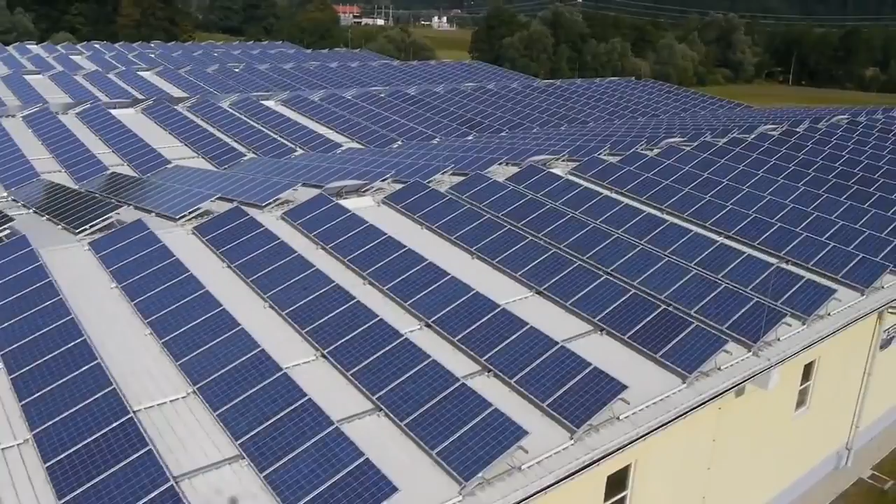However, a great debate is being waged by supporters of each technology. Elon Musk has called hydrogen fuel cell technology incredibly dumb, claiming they're more of a marketing ploy for automakers than a long-term solution. In contrast, Japan has announced its intention to become the world's first hydrogen society, with the Japanese government and the auto industry working together to introduce 160 hydrogen stations and 40,000 fuel cell vehicles by March 2021. So, which is actually better?

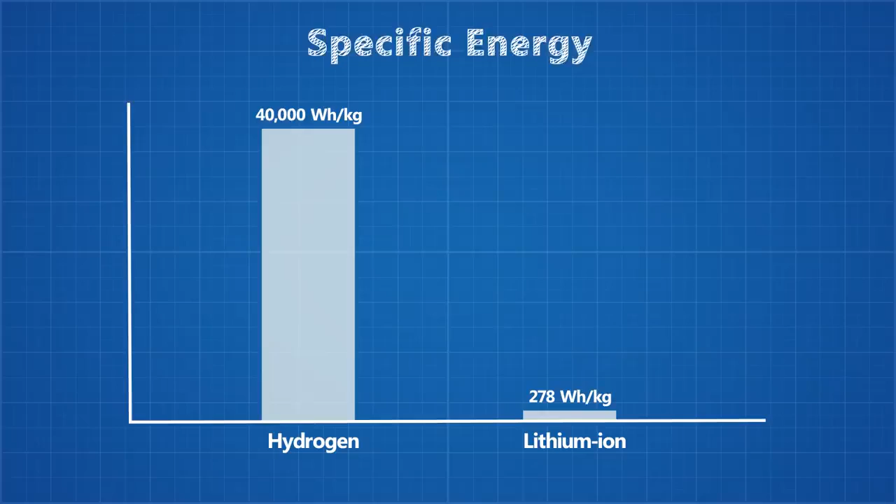At first glance, hydrogen seems like an extremely clever way to power a car. Compressed hydrogen has a specific energy of nearly 40,000 watt-hours per kilogram. Lithium-ion batteries, at best, have a specific energy of just 278 watt-hours per kilogram, but most fall around 167. That's 236 times as much energy per kilogram for hydrogen.

And because of its energy density and lightweight nature, compressed hydrogen and fuel cells can power cars for extended ranges without adding much weight, which, as we saw in our last video, is a gigantic roadblock for incorporating the technology into the aviation industry. The designers of electric vehicles are caught in a catch-22 with energy density and range.

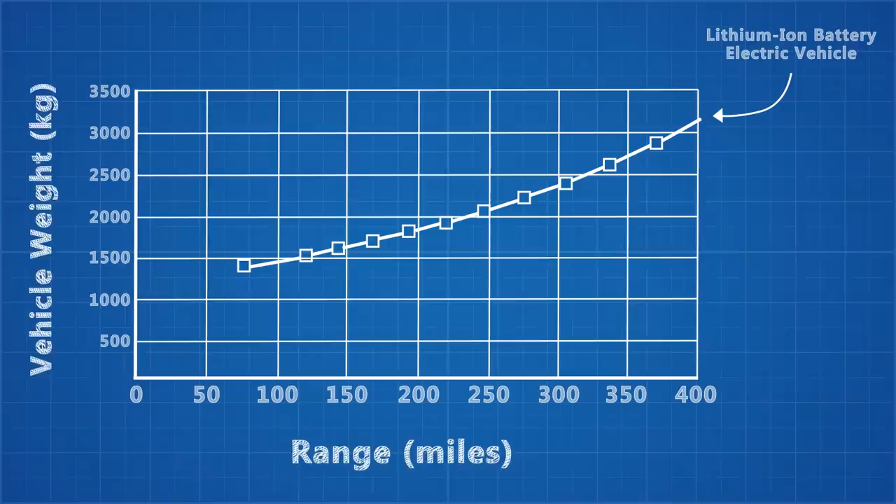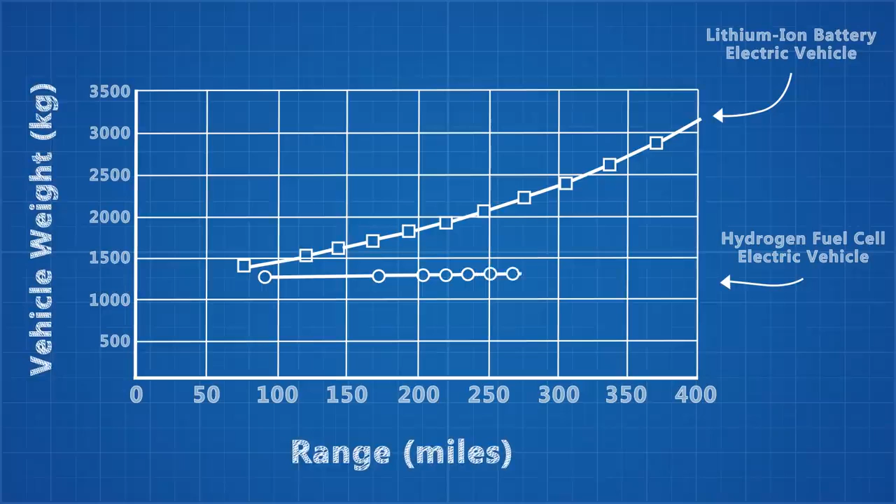Each extra kilogram of battery weight to increase range requires extra structural weight, heavier brakes, a higher torque motor, and in turn, more batteries to carry around this extra mass. This weight compounding limits how far a battery-powered vehicle can travel, until new technology can help reduce the weight of the batteries. For hydrogen vehicles, this weight compounding is not an issue.

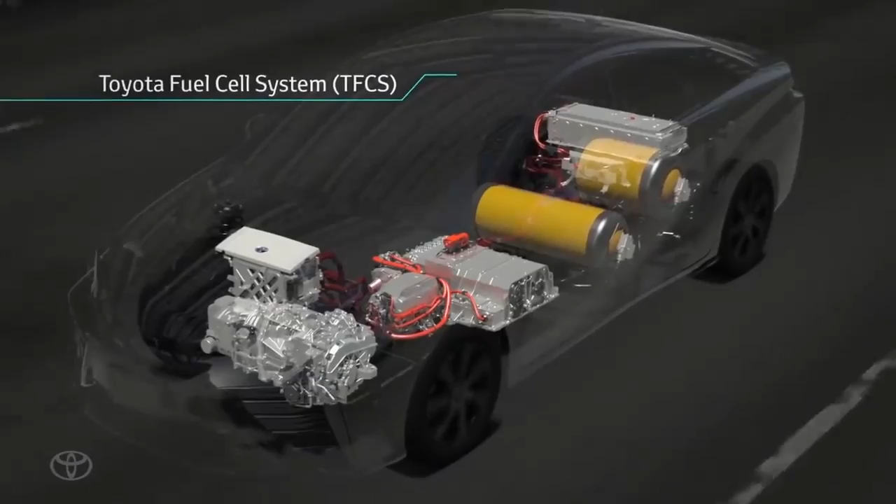Additionally, a hydrogen fuel cell vehicle can be refueled in under 5 minutes, where a battery-powered electric vehicle like a Tesla Model S takes over 3 hours to fully recharge. When looking at the range and refuel times hydrogen can offer, you can see why some car manufacturers are investing in this technology. On the face of it, hydrogen is a clear winner, but it falls behind when we start considering the end-to-end production process.

While both batteries and hydrogen fuel cells are both forms of electricity storage, the costs differ drastically. Fully charging a Tesla Model 3 with a 75 kilowatt-hour battery costs between $10 and $12 depending where you live. With a rated range of 500 kilometers, that's between 2 and 2.4 cents per kilometer.

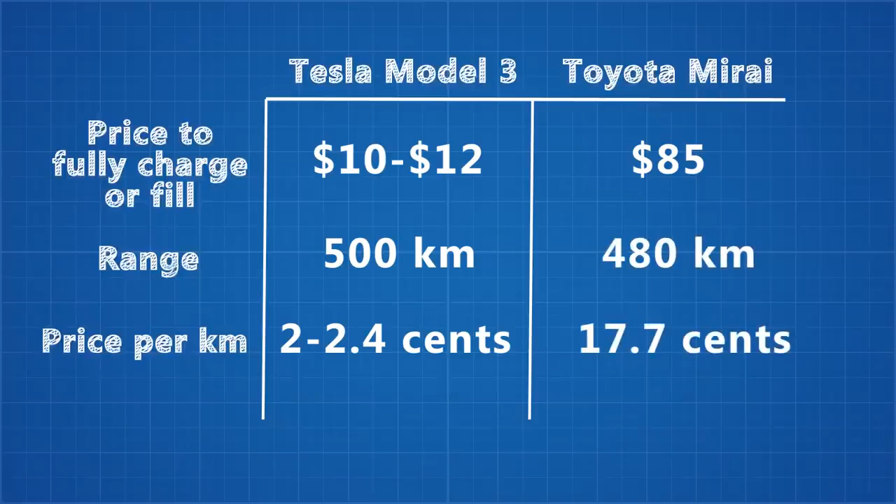A great price. In a previous video, I visited a petrol station that introduced a hydrogen pump, fed by its own on-site production facility, which used off-peak electricity to produce hydrogen. The hydrogen from this station cost $85 to fill a 5 kilogram tank of the Toyota Mirai on site, which had a range of 480 kilometers. That's 17.7 cents per kilometer, 8 times the price.

And here lies the problem. Hydrogen simply requires more energy to produce. To understand the economic viability of hydrogen, let's dig deeper into the production process.

Before any hydrogen vehicle can hit the road, you first need to produce the hydrogen. But hydrogen is not a readily available energy source. Even though hydrogen is the most abundant element in the universe, it is usually stored in water, hydrocarbons such as methane and other organic matter. One of the challenges of using hydrogen as an energy storage mechanism comes from being able to efficiently extract it from these compounds.

In the United States, the majority of hydrogen is produced through a process called steam reforming. Steam reforming is the process of combining high-temperature steam with natural gas to extract hydrogen. While steam reforming is the most common method of industrial hydrogen production, it requires a good deal of heat and is wildly inefficient. Hydrogen produced by steam reforming actually has less energy than the natural gas that the steam reforming began with. And while hydrogen fuel cells themselves don't produce pollution, this process does.

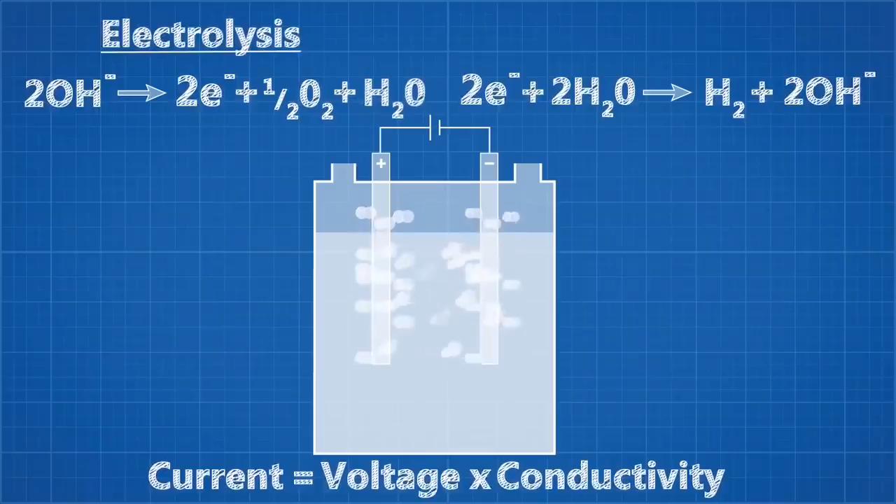So if we want to assume a future scenario with as little carbon emission as possible, this method won't cut it. Another method to produce hydrogen is electrolysis, separating the hydrogen out of water using an electric current. While the electricity needed for this process can be provided by renewable sources, it requires more energy input than steam reforming. You end up losing 30% of the energy from the original energy you put in from the renewables when you carry out electrolysis. So we are sitting at 70% energy efficiency from hydrogen fuel cells if traditional electrolysis is used before the car even starts its engine.

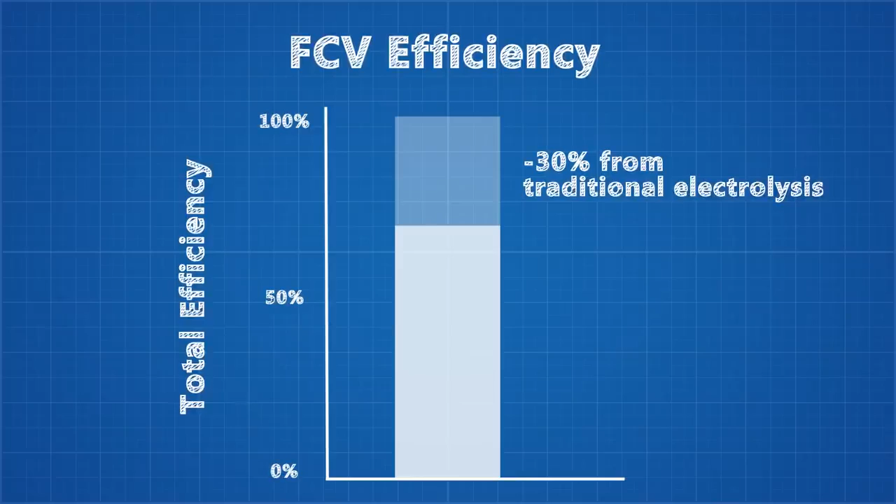A slightly more efficient method of producing hydrogen is proton exchange membrane electrolysis. Using this method, energy efficiencies can reach up to 80%, with the added benefit of being produced on site, which we will get to in a moment. But this is still a 20% loss of energy from the original electricity from the renewables.

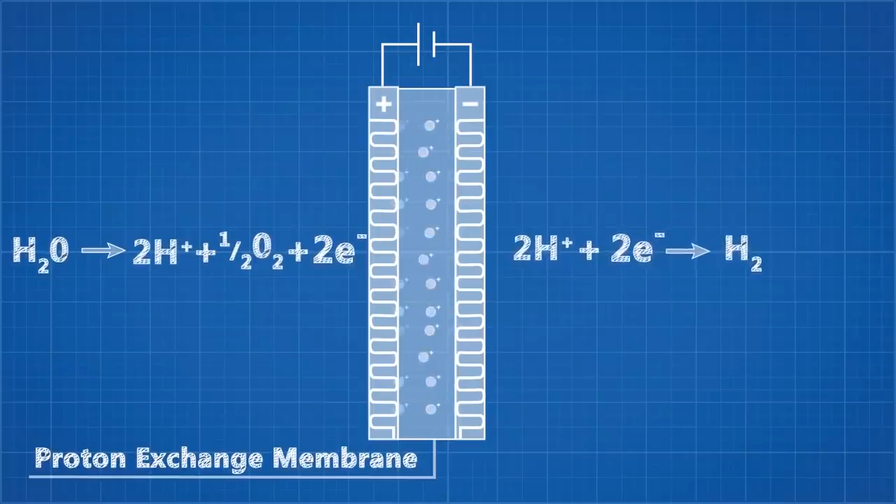Some experts say the efficiency of PEM electrolysis is expected to reach 82 to 86% before 2030, which is a great improvement, but still well short of the battery's charging efficiency at 99%. A 19% difference in production efficiency doesn't explain the difference in costs yet, so where else are we losing energy?

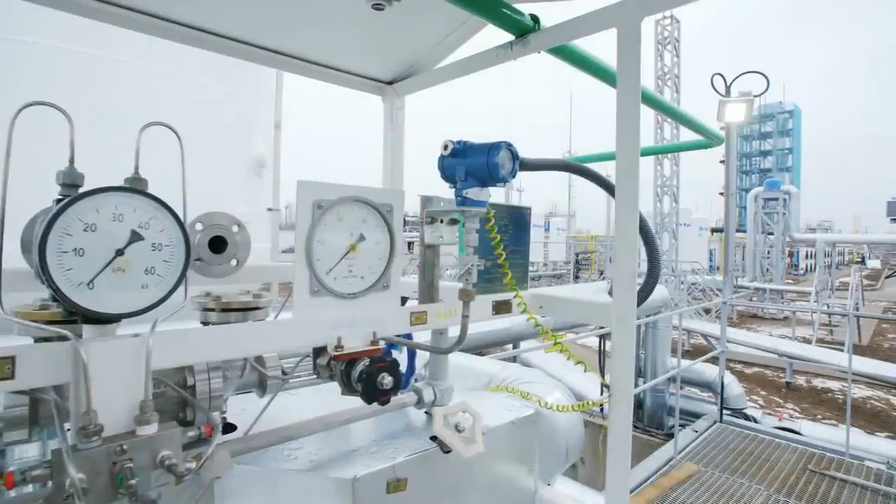The next hurdle in getting hydrogen fuel cell vehicles on the road is the transport and storage of the pure hydrogen. If we assume the hydrogen is produced on site, like it was for this petrol station, then we eliminate one energy sink. But the cost of storage is just as problematic.

Hydrogen is extremely low density as a gas and liquid, and so in order to achieve adequate energy density, we have to increase its actual density. We can do this in two ways. We can compress the hydrogen to 700 times atmospheric pressure, but that takes energy, about 13% of the total energy content of the hydrogen itself.

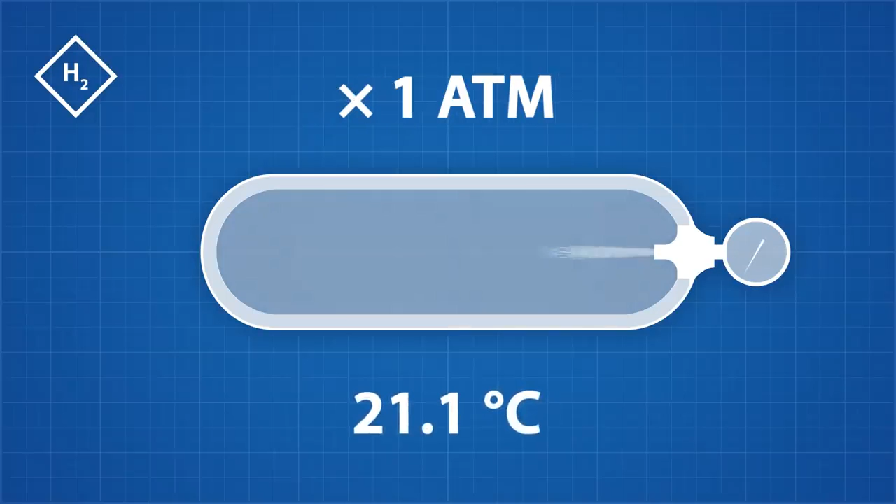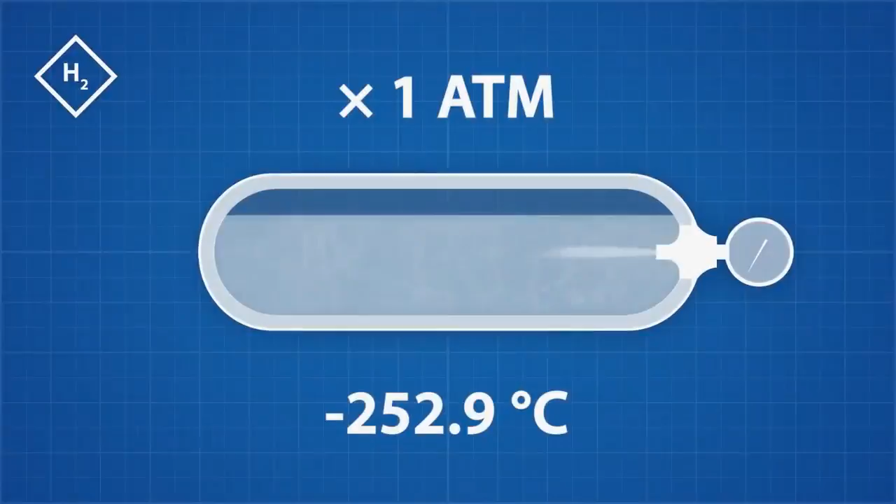Alternatively, we can turn hydrogen into liquid cryogenically. The advantage of hydrogen liquefaction is that a cryogenic hydrogen tank is much lighter than a tank that can hold pressurized hydrogen. But again, hydrogen's physical properties means hydrogen is harder to liquefy than any other gas except helium.

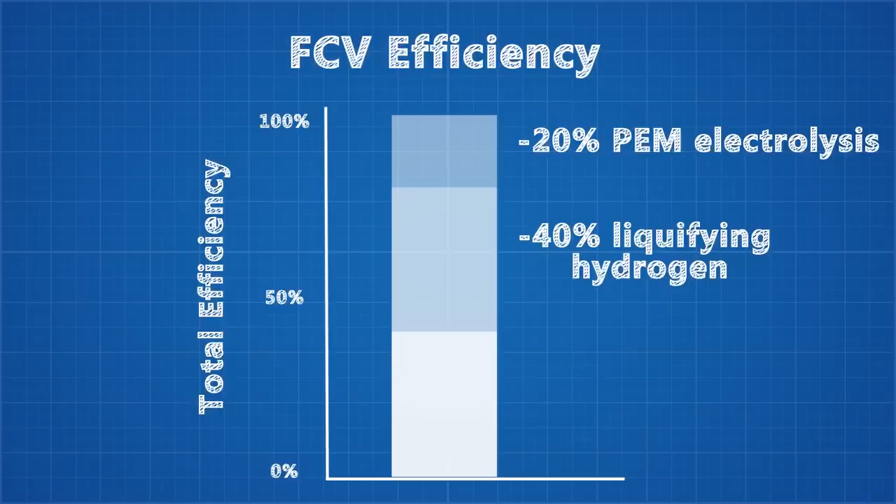Hydrogen is liquefied by reducing its temperature to minus 250 degrees Celsius, with an efficiency loss of 40% once you factor in the added weight of the refrigerators and the refrigeration itself, so pressurization is a better option at a 13% energy loss. Once the hydrogen is produced and compressed to a liquid or gas, a viable hydrogen infrastructure requires...

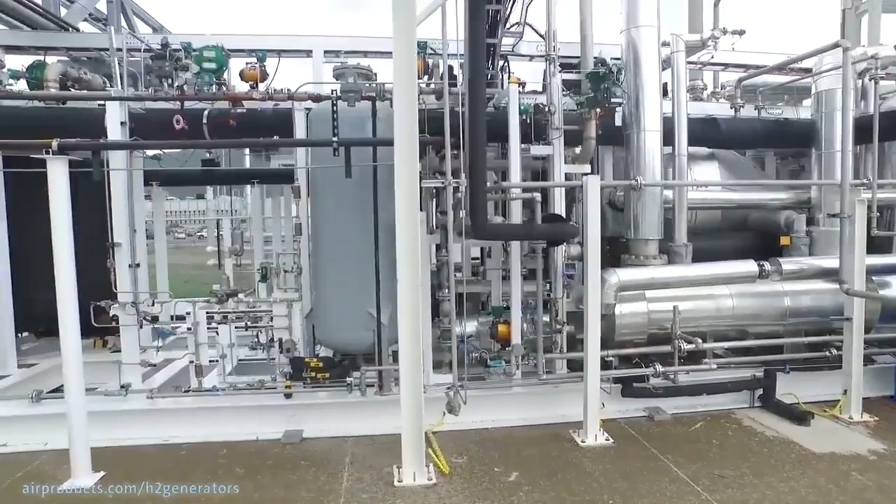...that hydrogen be able to be delivered from where it's produced to the point of end use, such as a vehicle refueling station. Where the hydrogen is produced can have a big impact on the cost and best method of delivery. For example, a large, centrally located hydrogen production facility can produce hydrogen at a lower cost because it is producing more, but it costs more to deliver the hydrogen because the point of use is further away.

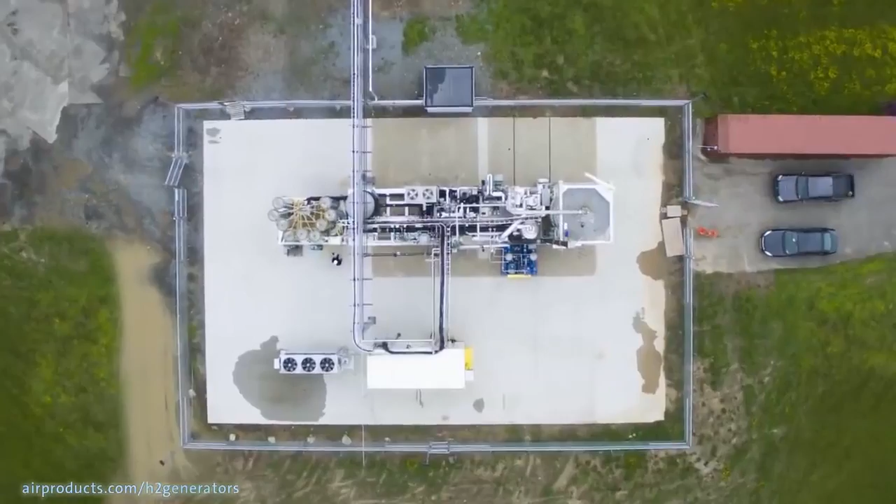In comparison, distributed production facilities produce hydrogen on site, so delivery costs are relatively low, but the cost to produce the hydrogen is likely to be higher because the production volumes are less.

While there are some small-scale on-site hydrogen production facilities being installed at refueling pumps, such as the station mentioned in my last hydrogen video, until this infrastructure is widespread, we have to assume that the majority of hydrogen is being transported by truck or pipeline, where we know that the energy losses can range from 10% up to 40%.

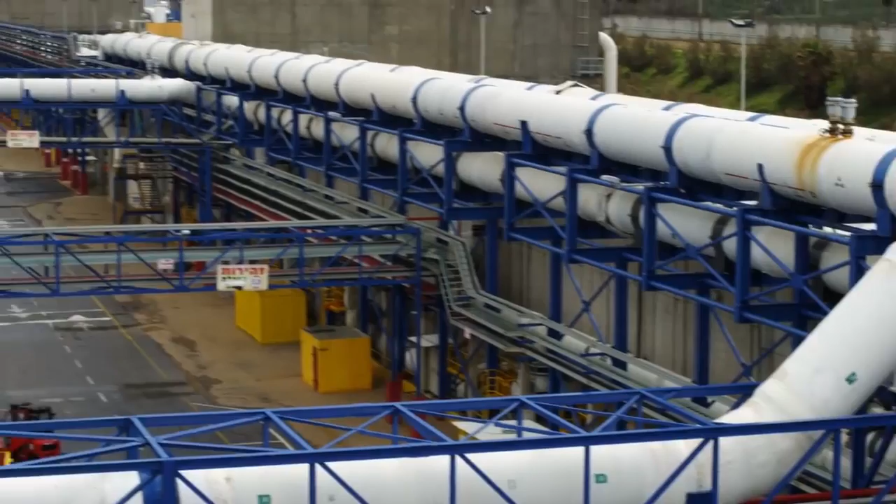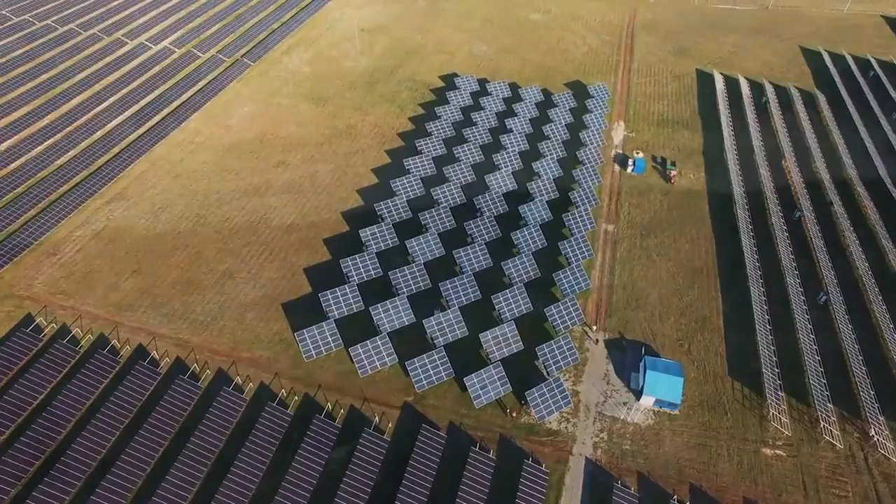In comparison, assuming that the electricity we use for charging the batteries comes from completely renewable resources, we just have to consider the transmission losses in the grid. Using the United States grid as a reference for typical grid losses, the average loss is only 5%.

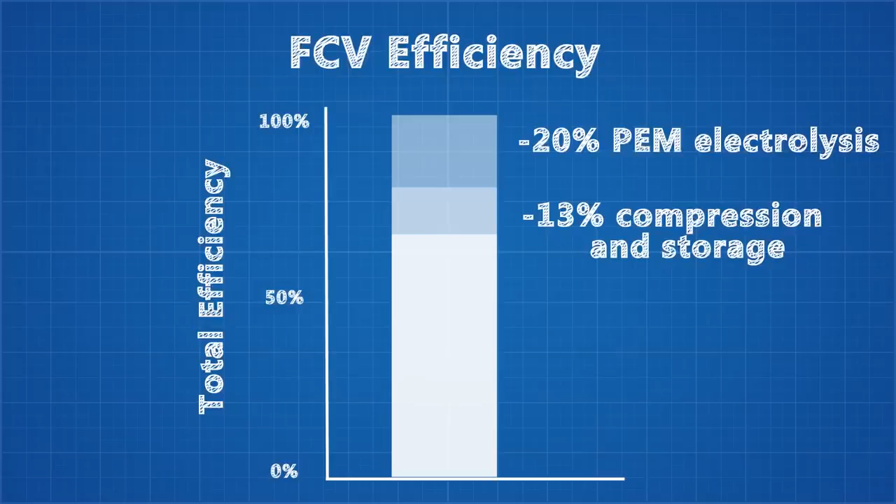So in the best case scenario for hydrogen, using the most efficient means of production and transport, we lose 20% of energy during PEM electrolysis and around 13% for compression and storage, amounting to a 33% loss. In other systems, this could be as much as 56%.

For battery power up to this point, we've lost just 6% to the grid and recharging, bringing our best case efficiency difference to 27% and our worst case to 50%.

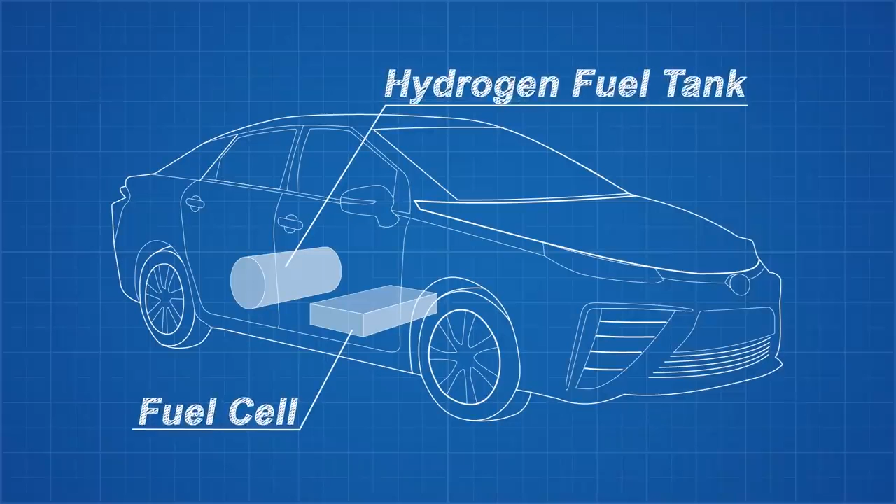The next stage of powering electric vehicles is what is called the tank-to-wheel conversion efficiency. For hydrogen fuel vehicles, once the hydrogen is in the tank, it must be reconverted into electric power. This is done via a fuel cell, which essentially works like a PEM electrolyzer but in reverse.

In a PEM fuel cell, hydrogen gas flows through channels to an anode, where a catalyst causes the hydrogen molecules to separate into protons and electrons. Once again, the membrane only allows protons to pass through it, while electrons flow through an external circuit to the cathode. This flow of electrons is the electricity that is used to power the vehicle's electric motors.

If the fuel cell is powered with pure hydrogen, it has the potential to be around 60% efficient, with most of the wasted energy lost to heat.

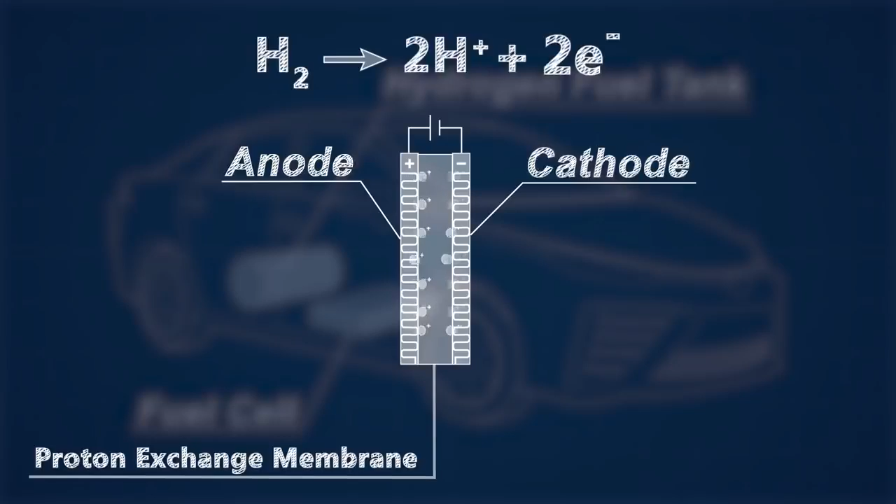Like hydrogen fuel cells, batteries come with inefficiencies and energy losses. The grid provides AC current while the batteries store the charge in DC, so to convert AC to DC, we need a charger. Using the Tesla Model S as an example, its peak charger efficiency is around 92%.

The Tesla Model S runs on AC motors. Therefore, to convert the DC current supplied by the batteries to AC current, an inverter has to be used with an efficiency of roughly 90%.

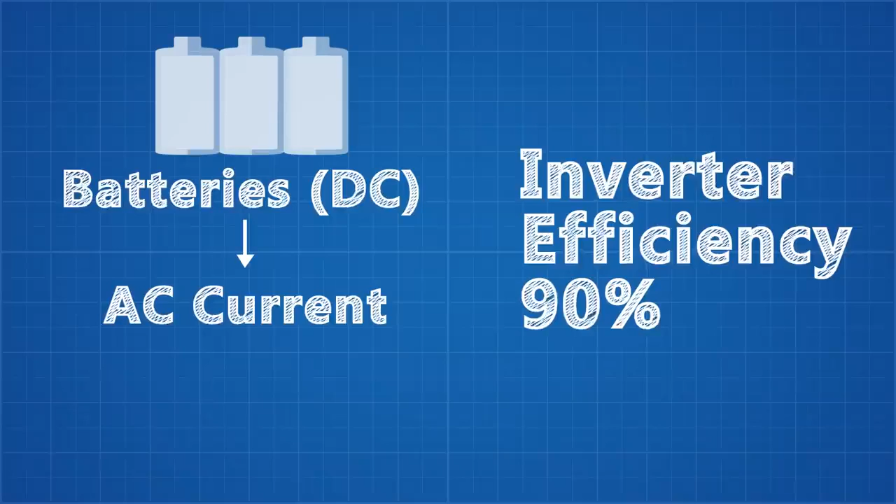Additionally, lithium-ion batteries can lose energy due to leakage. A good estimate for the charging efficiency of a lithium-ion battery is 90%. All of these factors combined lead to a total efficiency of around 75%.

However, hydrogen fuel cell vehicles have some of these same inefficiencies. Any kind of electrolysis requires DC current, and therefore a rectifier will be required to convert the AC current from the grid to DC.

The conversion efficiency here is 92%. We also need to convert the DC current produced by the fuel cell to AC current to power the motor through an inverter with an efficiency of 90%.

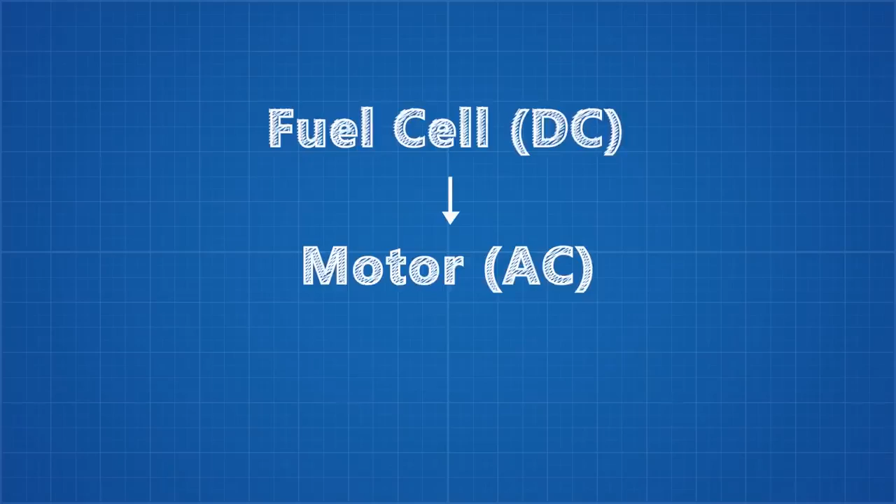Finally, the efficiency of the motor must be considered for both fuel cell and battery powered vehicles. Currently this is around 90 to 95% for both, which is amazing considering internal combustion engines running on petrol have an efficiency of only around 20 to 30%.

If we add up all these inefficiencies and compare current generation batteries to the best and worst case scenario for current gen hydrogen, we can see how they measure up. Even with the best case scenario, not accounting for transport due to on-site production, and assuming a high electrolysis efficiency of 80% and a high fuel cell efficiency of 60%, hydrogen still comes out at less than half the efficiency. The worst case scenario is even worse off.

So while you may be able to go further on one fill-up of hydrogen in your fuel cell vehicle over a battery-powered electric vehicle, the cost needed to deliver that one fill-up would be astronomically higher compared to charging batteries due to these energy losses and inefficiencies.

Based on our worst case scenario, we could expect the cost per kilometre to be about 3.5 times greater for hydrogen. But as we saw earlier, it's actually 8 times the price, so additional costs of production unrelated to efficiencies are obviously at play. The cost of construction of the facility is one, and the profit the station takes from the sale is another. For now, these inefficiencies and costs are driving the market, where most investment and research is going into battery-powered electric vehicles.

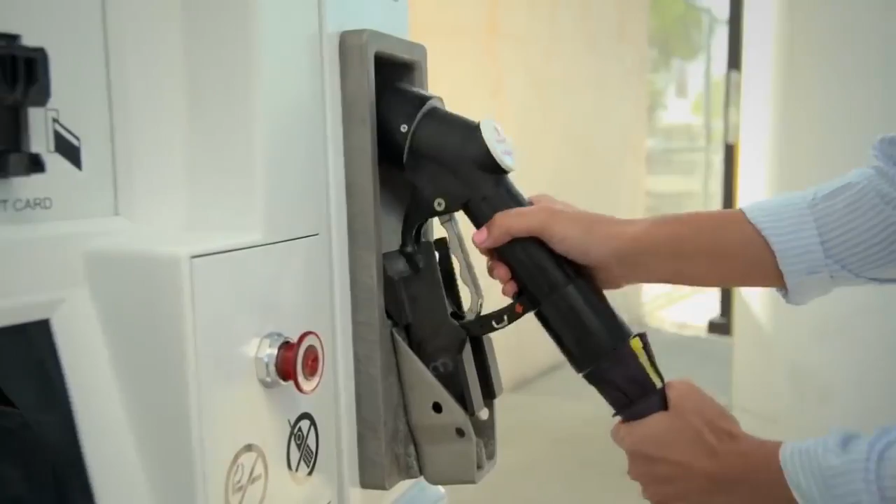So which wins? Both are equally more green than internal combustion engines, assuming equal renewable resources are used to power them. Fuel cells allow for fast fill-up times and long ranges, a big advantage, but battery-powered vehicles might catch up in range by the time there are enough hydrogen stations to make fuel cell vehicles viable.

While fuel cells are efficient relative to combustion engines, they are not as efficient as batteries. They may make more sense for operation disconnected from the grid, or as we saw in our last video, using hydrogen for planes actually could make a lot of sense, but that's a topic for another video. For now, battery-powered electric vehicles seem to be the sensible choice going forward in the quest for pollution-free consumer transport.